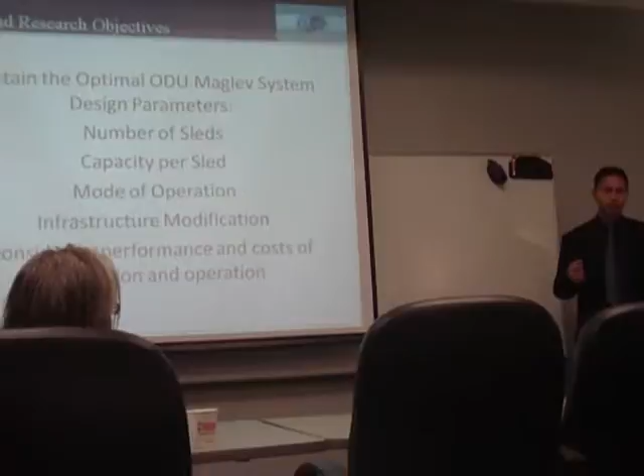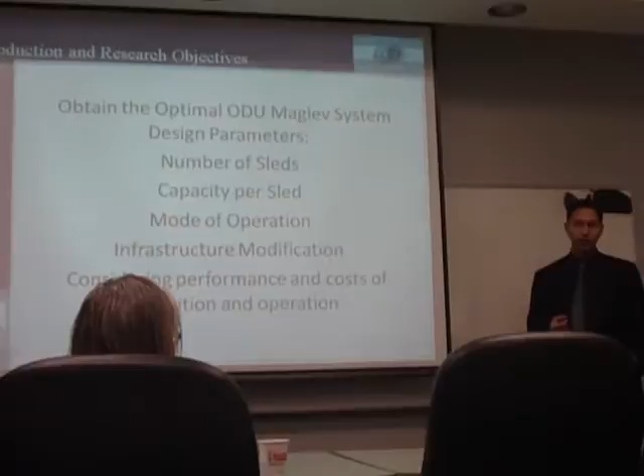Maglev technology has been around for a century, and it is used for maglev trains, and it's projected as the best candidate for future public transportation. Interest in it waned during the 1950s, due to problems in costs and due to railroad costs. And it has seen its resurgence in the past 20 years. But still the challenge remains on how to make the system cost effective. To make it cost effective, my research focuses on how to optimize the system, because when we optimize the system, cost effectiveness is automatically obtained.

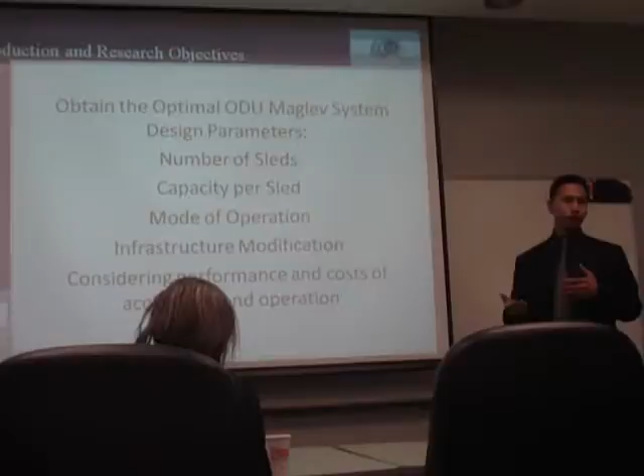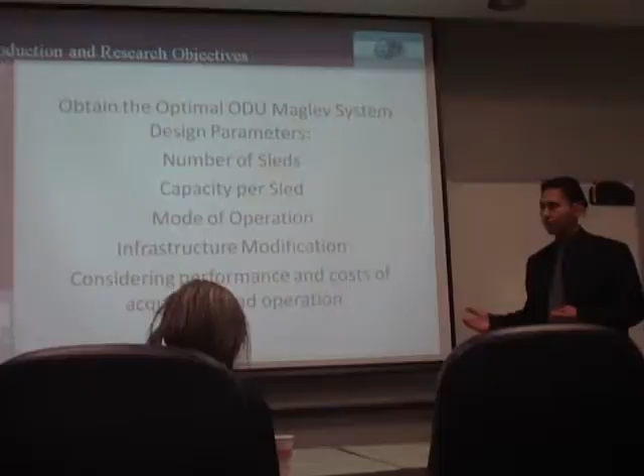How do I go about optimizing the system? I have here my research objectives. For a maglev system, I need the number of sleds or the train itself. I need to know the capacity of each sled. I need to know the mode of operation. What is the pattern of movement of the sleds? And do I modify something in the current infrastructure? Do I add parking areas? And this I need to do by considering the performance metrics and the vehicle cost, acquiring the vehicle and operational costs.

So this afternoon, I've already introduced and my research objectives were already identified. I will give you a sense of what the system inputs are, what is my ridership demand, modes of operation, figures of merit, simulation, then I'll discuss the results and analysis, form a conclusion, and then discuss some possible future work.

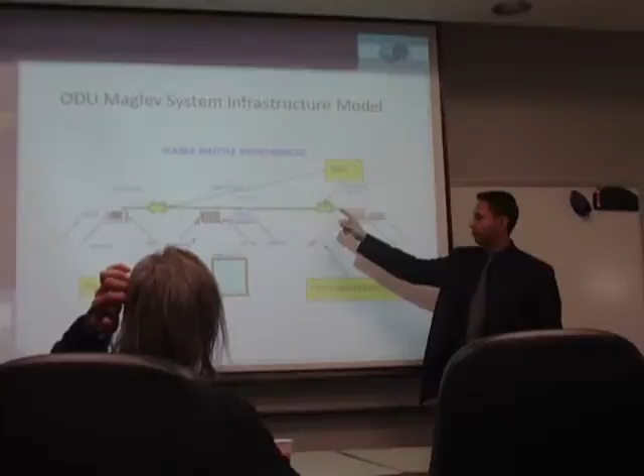And one of the things I have to do is, from that infrastructure, I had to model it in a software. I used Arena, discrete event simulation. And you can see one of the snapshots that I made for a certain type of mode. There are 2 sleds, passengers entering this Webb station, passengers exiting, and that is how it looks. Now, to get a better sense immediately of what has been done in this research, I'll give you a short 2-minute video presentation.

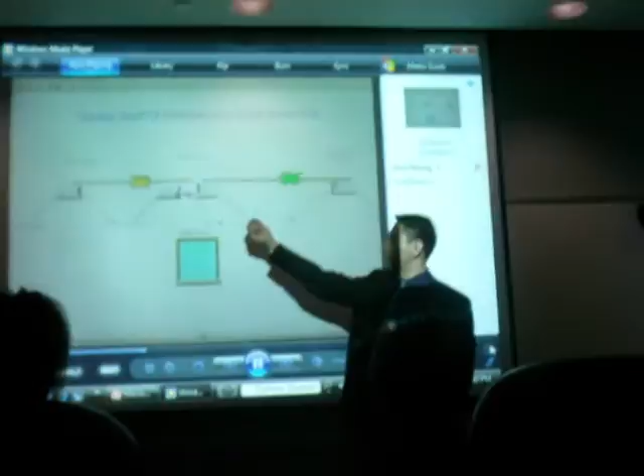Full screen. So, as you can see, 2 sleds are going back and forth to the station. This is double shuttle asynchronous. Just focus on the movement of the sleds, the arrival of the passengers, and the exit of the passengers. And this is another pattern of movement. It's called double shuttle synchronous, which I will be discussing in a little while. You can see the passengers, 2 sleds converging at the center, and in a synchronous fashion, this one has to wait, and it will leave the station at the same time.

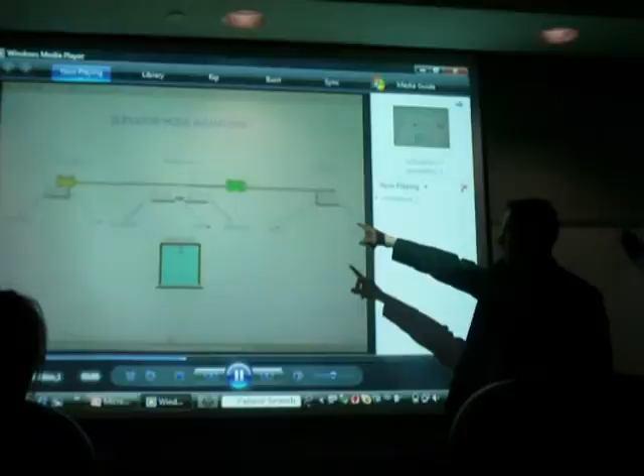This is another mode that's called the double elevator mode. Notice that in the first 2 animations, the 2 sleds are constantly moving. In this one, there's no passenger at the left-hand side, at the station pair. For the right-hand side, it still moves. It depends if there are passengers arriving.

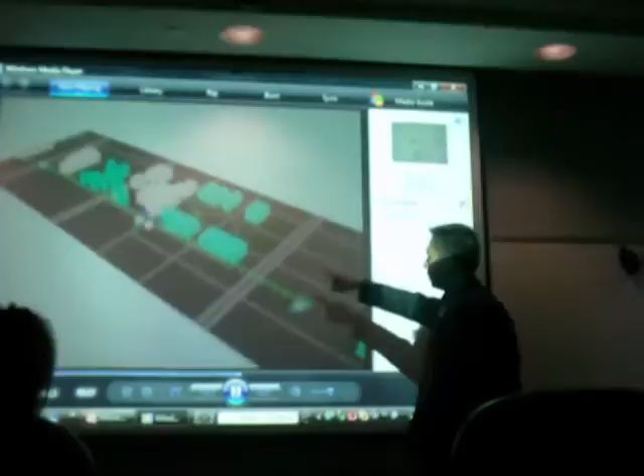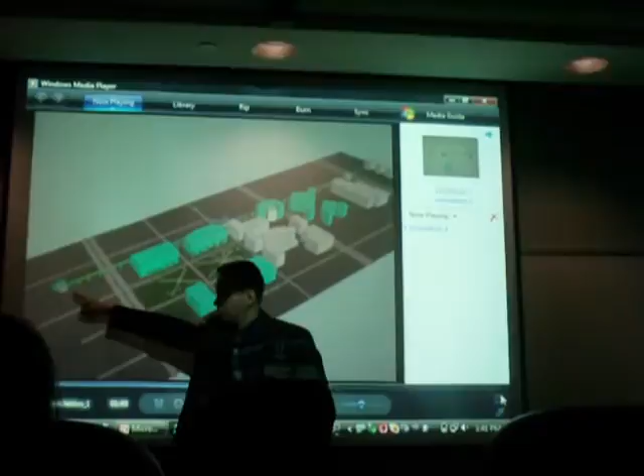Now, this is a 3D shuttle animation that I made for this research. So as you can see, ODU, you have passengers coming from TED. This is Hampton Boulevard. This is the whole maglev track, 1,000 meters approximately. And you can see the buildings, Webb Center, and people, after riding the trains, they proceed to their respective classes. This is during class peak or class times. So there are passengers here who were not able to make it to the train, so they just opted to walk, and they just went straight to their respective buildings.

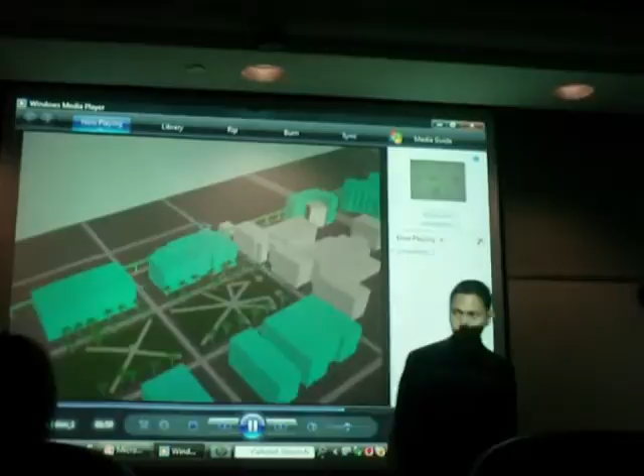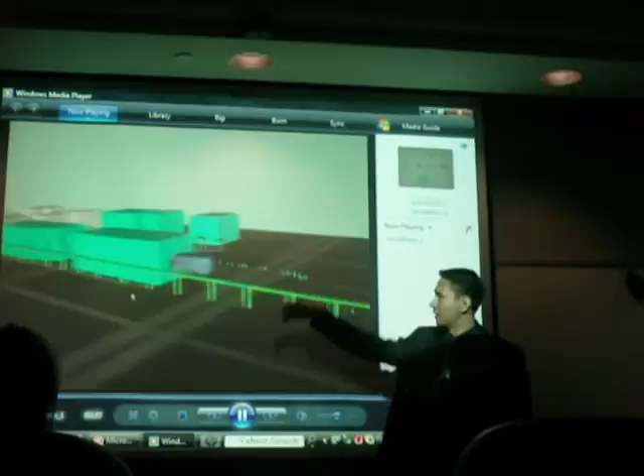So this is a close-up view of the passengers. And I just like to show a more detailed view of the maglev. So some more animation there. So the passengers coming from TED are proceeding to the Webb station, and still getting more passengers. Waits for some 20 seconds, goes back to Webb station. So this is how it's going to look if our transportation system is fully operational.